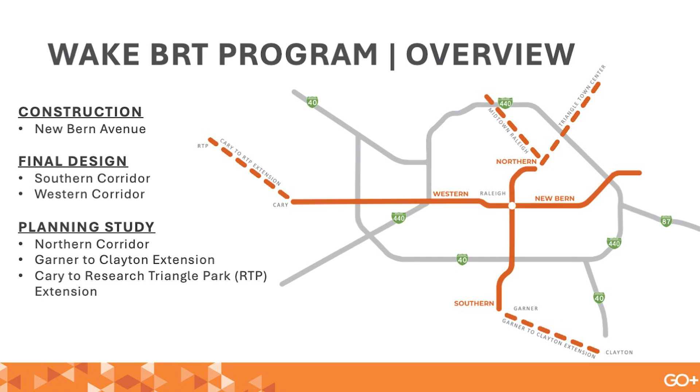The reason for having this slide and the next is to help everyone understand this is not a single project. There are multiple projects of similar scale and style following suit as soon as we begin the first project. New Bern Avenue is in that pre-construction phase.

We are looking to re-advertise the construction of New Bern Avenue in spring 2025. If all goes well from a federal funding perspective for the southern and western corridors, there are anticipated construction bid timelines as well: the southern corridor potentially in 2027, if all goes well with final design and our federal grant agreement, and the western corridor potentially in 2028, contingent on federal funding award and allocation.

Those planning studies will take a little bit longer, but again, there's more than 3 corridors — there's a 4th corridor being split into 2. There's a lot of work related to this type of project in the pipeline between now and 2035.

So we'll walk through the history for New Bern Avenue and the construction advertisement. In March of 2024, we advertised New Bern Avenue for construction. You'll hear about the project overview in a minute, but we advertised the project as a whole — the entire project, stations included, everything as one package — in March of 2024.

We did not receive any bids. We got feedback from the contractor community at that time and decided to break up the horizontal roadway work from the vertical station design work, re-advertising just the horizontal roadway work in August of 2024.

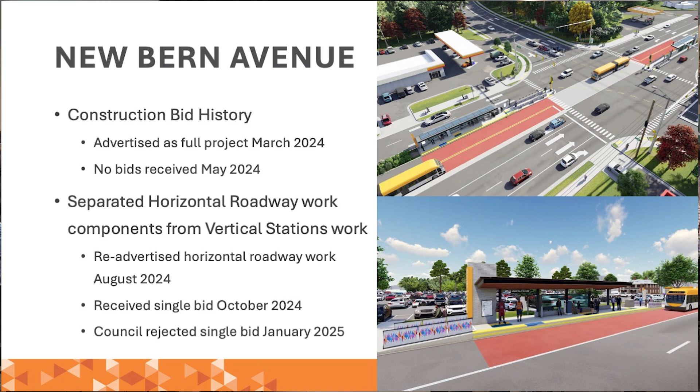We received a single bid in October of 2024, which was rejected by council in January of 2025. That is why we're here today, looking for feedback on the next steps of the approach we've identified, as well as working towards how we move this project forward.

Sam, I don't know if you want to add anything else there.

The decision to re-advertise it the first time, breaking it up, was a result of feedback from contractors in the area, contractors that have performed similar projects around the country, and other authorities that have delivered projects and were successful breaking it up that way. So that's why we came to that choice on the last round — kind of a similar loop to getting to this point.

Does anybody have any questions about those steps along the way?

It was significantly above the budget allotted for the overall project, and keep in mind that scope that was bid at that point was not the entire project anymore. So we had to consider the long-term fiscal impacts for being able to deliver future projects in the pipeline, as well as this one getting on the ground.

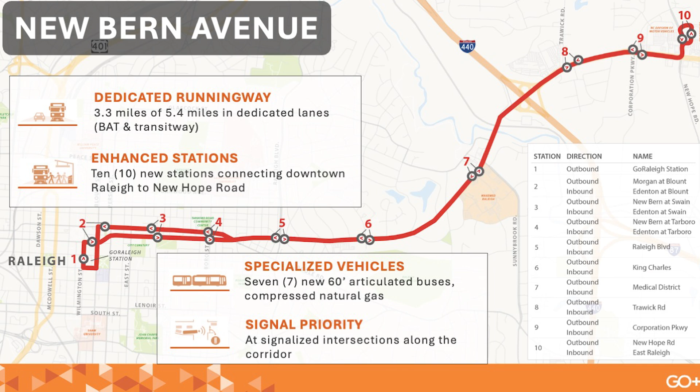Going into the actual project itself, for New Bern Avenue, we have 3.3 miles of dedicated bus lanes on a 5.4 mile corridor. Those dedicated bus lanes have different flavors. In downtown, there is right business access and transit lanes, so those are bus lanes along the right side of the roadway. In the middle part of the corridor, there's the median running transit way, which is dedicated bus lanes physically separated from general purpose traffic. We have 10 new enhanced stations totaling 19 platforms constructed as part of this project. They are about half a mile apart throughout downtown to East Raleigh. Most of them are level boarding stations, which make it easier for passengers to get on and off the bus faster. We'll have 60-foot articulated buses - we already have those - and then we have transit signal priority at signalized intersections.

Now I'm going to go through geographic areas of the work where there are some differences in how we could break up the project to allow for more cohesiveness or work opportunities.

So I mentioned the bus rapid transit running way treatments. In the downtown area, we have business access and transit lanes along the right side of the roadway. There's not a lot of significant road work happening there other than mill and surfacing, roadway resurfacing, lane restriping. There will be transit signal upgrades as well as some public utility work needed in this part of the project, and then the concrete multi-use path and crosswalks at intersections. Again, I want to highlight...

Since that first advertisement, we have decided to break out the vertical station work. So at this point, any re-advertisement will initially focus on the linear roadway work that's needed, and then the vertical station work will follow at a later date.

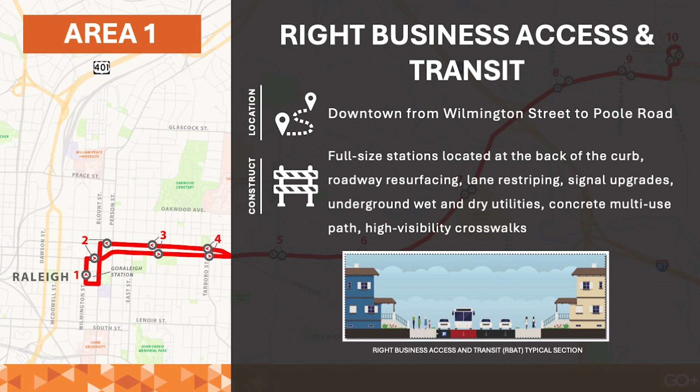So Area 2, this is the median running transit way, from Poole Road to WakeMed at Sunnybrook Road. This is the area where we have the most amount of road work happening. There is actual widening into the median to build the dedicated bus lanes. There is the multi-use path on the south side of New Bern Avenue, as well as new travel lanes for New Bern Avenue when the widening occurs. This part of the project has more significant roadway work - widening, resurfacing, median reconstruction, curb and gutter upgrades, traffic signal upgrades, and public utility conflicts that need to be moved.

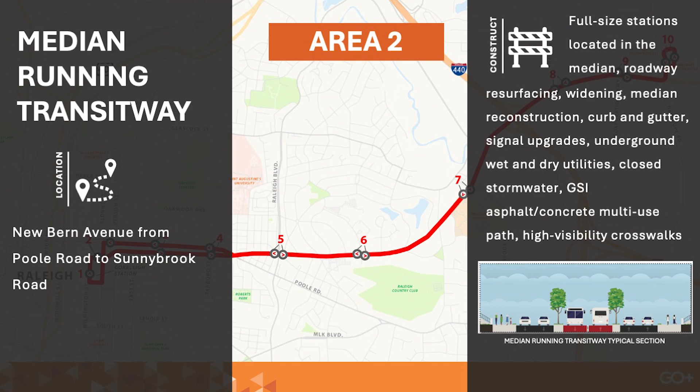Those will also happen in this area, along with some green stormwater infrastructure, and the multi-use path I mentioned. In this area we have complete lane closure in one direction for the eastbound work first, then for the westbound work. We'll have temporary traffic lanes built in the median to accommodate that traffic shift between phases, and those temporary lanes will be where ultimately the BRT bus lanes will go at the end of the project, as the final phase of construction.

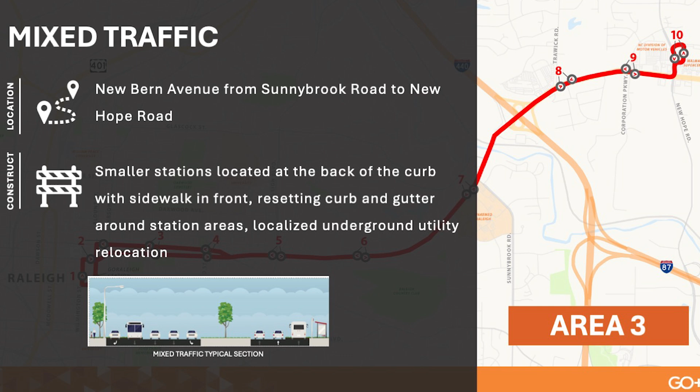And our thinking currently is that the amount of work in this area, apart from the stations, which will be bid separately, is not enough to warrant its own separate contract package. We'll talk about that a little bit more, but feel free to disabuse us of that notion today. If you disagree with that, and you'd be happy to do the amount of work that's in this area as its own separate package.

Provide that feedback, please. And this is where, again, at the end of this, there are boards for Area 1, Area 2, Area 3 that have highlights of some of the quantities that are included in that construction package. So it'll give you a better idea of how much work is anticipated under each area.

So we're going to go back to our Mentimeter. Hopefully you still have that open on your phones and are easily able to get back into it. If not, go to menti.com and use the code at the top, 63612035. Our question is, what is the first word that comes to mind when you think about bidding on the New Bern Avenue BRT project?

That is correct. We have seen a delay.

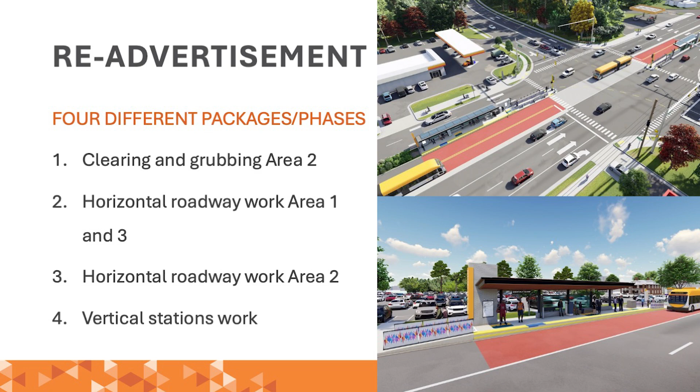What happens if you do not get any bids for horizontal roadway work Area 1 and 3?

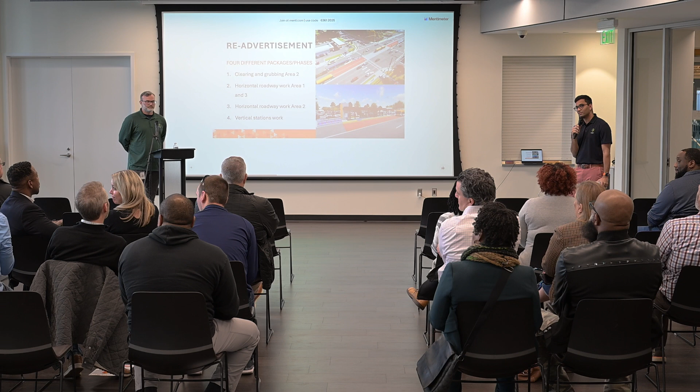Why wouldn't you bid? That's the same question we'll be faced with at each of the other stages we've been at, so we'll have to make that decision when we come to it. Is it because 1 and 3 is the worst and ugliest part of the project, and 2 is the better part? I'm just asking that question for the thought. Could happen. I think that is the feedback we're looking for here.

One of the challenges we identified as part of the project, when it was re-advertised again as a full package, was there were so much risk and utility questions or concerns within Area 2 as well as other areas of the project. So we're trying to reduce those risks by breaking it out into smaller geographic components, as well as allowing contractors who may not have a large potential pursuit library, or want to pursue a large project, to be able to identify smaller work in the area that they can go after.

That's exactly right, and I think some of the information about the utility work will address that some. Also, there are several Area 2, 3, 4 projects that have been let recently by Raleigh, so now that you're focusing in on Area 2 as opposed to the whole project, we've got similar projects that have been let that should give a good comparison base for what kind of bids we can get for similar size and scope.

We heard a lot about schedule. This is the current approach for those 4 packages: clearing and grubbing, early 2025 spring re-advertisement with an anticipated schedule of 2 months. Construction for all horizontal elements for Area 1 and 3, re-advertisement in spring of 2025 with a 24-month schedule. Construction of all horizontal elements within Area 2, the more significant roadway work, summer of 2025 with a 34-month schedule. And construction of all vertical elements, the stations, is to be determined.

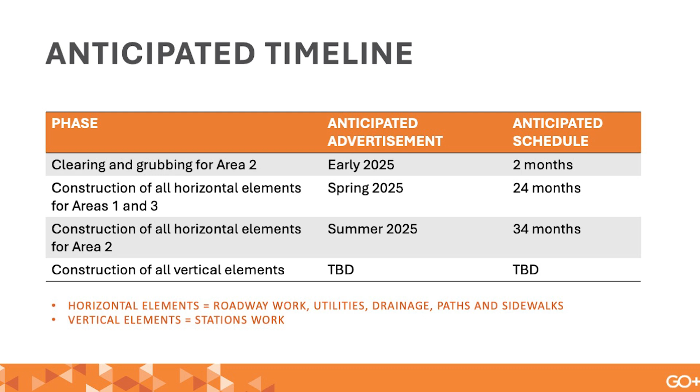That activity needs to understand how much of the horizontal roadway work has been completed to coordinate the schedule of vertical construction activities. We're also going to define more of the dates of availability for work in the vertical areas, and those will be included - as opposed to the last bid advertisement where we left that up to coordination with the horizontal contractor. We're going to provide a schedule for those things to take out some of the questions and risks people are identifying as concerns.

All right, so we're going to go to our next important question. On a scale of 1 to 10, how confident are you that the timelines identified for those packages I just mentioned are achievable? This is a dragging scale of not confident to very confident, with not confident being to the left.

Do you know if we're able to show the other slide while they're responding to this one? Oh, sorry, yeah.

Just regarding this question about achievability of timeline, is it assuming a certain budget amount or not? I'd assume that at a certain level, most timelines are achievable if you can throw enough resources at it, but it might not be as achievable based on a certain number. This is separate from assuming a contract has been awarded. So I'll try to answer it differently. I think the question is if we advertised package 1 and 3 with a 24-month schedule, would a contractor feel comfortable they can deliver that in 24 months with whatever resources they have allocated elsewhere in the region or state? I feel like it still depends on what money would be accepted as a responsive bid versus rejected. All schedules are achievable if enough resources are thrown at them, but not within any realm -- if it's a certain number, it may not be. I'm just putting that out there.

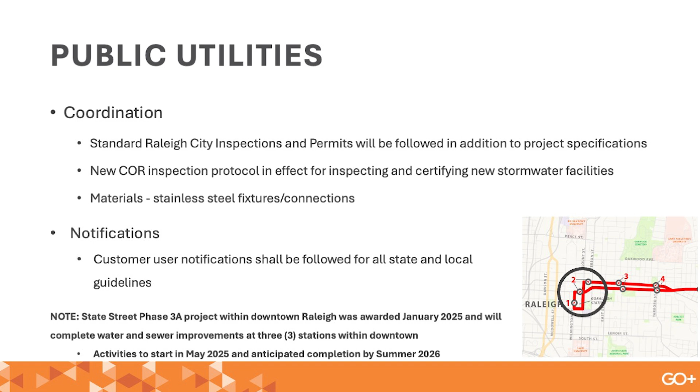So we have dates in the contract for this area for when those areas will be available, and that was kind of open-ended previously. We didn't have those dates specific in the previous bids. We'll have those included in the contract timelines this time, so that's a little more certainty there.

On the private utility side, more good news, hopefully — that's how it will be seen. We've had significant progress on private utility relocation over the period since the previous advertisement. AT&T conduit in Area 1 is done, and AT&T in Area 2 has made significant progress.

They're down past Donald Ross, and they did hit a little bit of rock, but there's good news there too because Dominion has gone through that area already. They've completed their relocations; they also hit rock, but it was manageable, and they got through it quicker than we had estimated.

So those utilities are going to be significantly complete, we estimate, before those roadway packages are likely to go to notice to proceed. There's still the conduit installation, and there will still be some work for them changing over their fiber from the old to the new conduits, but that's much more manageable in terms of getting them out of your way in any areas of common work.

Any questions on those utilities? Good news, right?

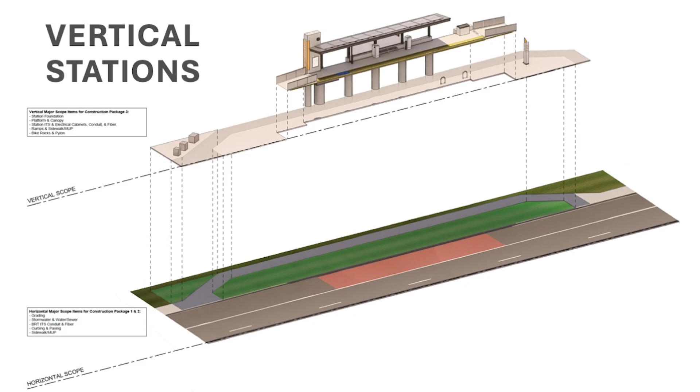This is kind of hard to see, but this is a breakout of the vertical stations and the components included in the station work versus the linear horizontal work. This is a typology of the station you would see within Area 1, on the right side of the roadway downtown. Again, you're seeing the linear road work and sidewalk work as part of the roadway side of things, with the station's vertical components separated out.

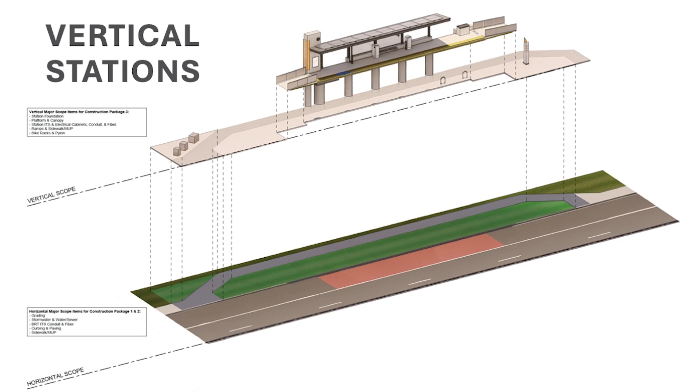I think we got a lot of questions in the previous round of advertisement about how we broke out these components, and the coordination efforts involved. We tried to provide more detail than last time. If you have specific questions on how this is being shown, talk about it today, back at the other stations, or go home, view it in the slides, and follow up with more questions. We're happy to go over any of that.

The question was whether there's any art in the stations — that won't be included in the construction packages. There is art integration, but it'll be part of the vertical work, not the linear horizontal roadway work. We do have a slide about that as well, so we'll update on what that looks like.

So I'm going to flip through the next couple of images maybe a little bit more quickly.

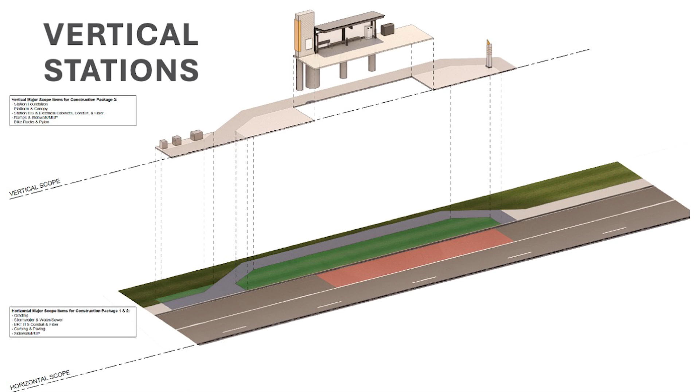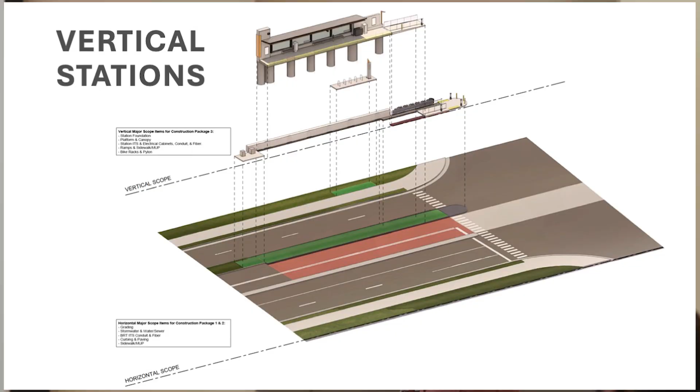So art was a question that just came up. We do have 3 different types of art. Artists have been selected, and they have worked to date on finishing their art pieces that will go into each station area.

There is concrete art that is anticipated to go into the station platform, as well as the surrounding areas of the platform. Railing art, which will actually be tied to the stations, will be provided by the City of Raleigh, with installation being the contractor's responsibility. And then windscreen art, which would be a print-ready digital file provided by the City of Raleigh through the artist, and that would go into the station vertical contract as well.

Again, we're taking on the responsibility or coordination component of working with the selected vertical design or vertical construction contractor to make sure that the art is integrated in the appropriate places through artist feedback as needed.

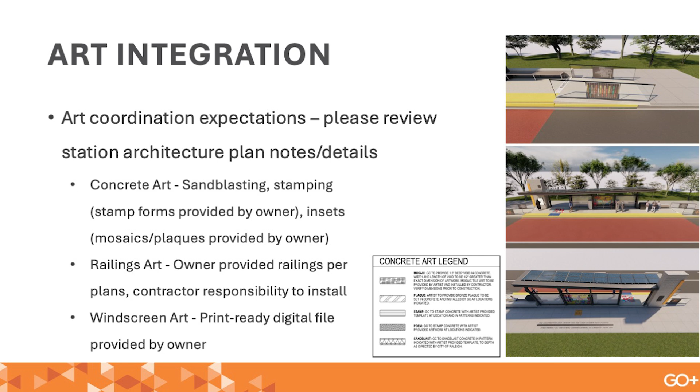And then just to reiterate, typical utility department inspections for water hookups, sewer hookups will still have to be followed as with any other typical city project.

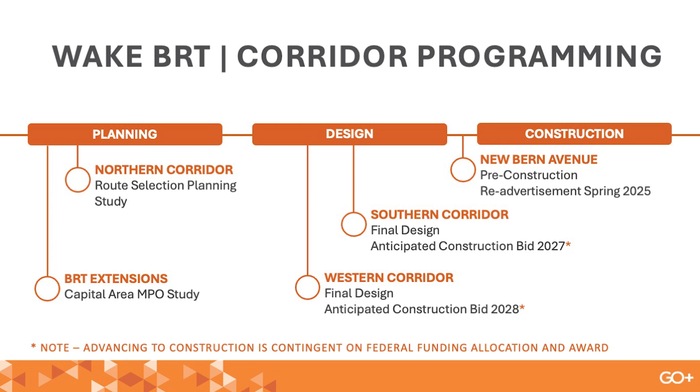All right, so we're going to segue a little bit away from New Bern Avenue for a few minutes here towards the end of the presentation, bringing back the programming slide to try to highlight the other projects coming down the pipeline. Again, I mentioned the Southern Corridor and the Western Corridor both are in final design. Western Corridor is about a year behind the Southern Corridor, but Southern Corridor potentially getting to construction bid in 2027, and then Western Corridor potentially getting to construction bid by 2028.

And so we wanted to provide a little bit more about the project for both of those corridors and the total budget that's identified through the federal grant application that we've completed for the project.

So Southern Corridor is about the same size as New Bern Avenue. It's 5.1 miles with 3.8 miles of dedicated bus lanes, 9 new stations as part of that project, 7 buses that we would be acquiring for that project as well, and we'll have traffic signal upgrades along the entire corridor. Total project cost for that project is $175 million. That is all-inclusive project cost, meaning professional services, design costs, right-of-way, as well as construction. So that's not just the construction budget, but the overall project budget submitted to the Federal Transit Administration.

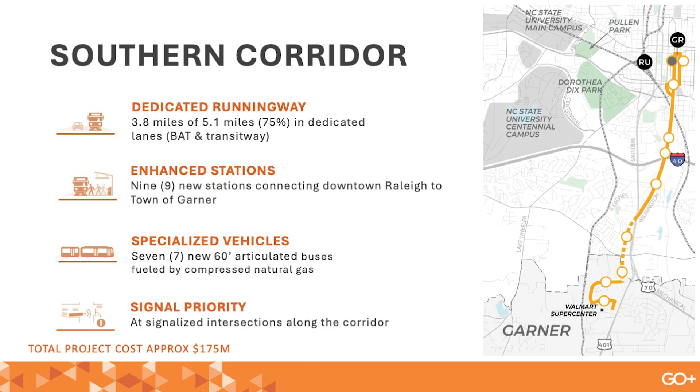And the reason for the Southern Corridor being $175 million, even at a 5-mile corridor, is because of the dashed line you see on the map, which is a new roadway extension for the project that has more right-of-way impacts as well as construction of a new roadway facility that's been on the City of Raleigh Streets plan for quite some time.

Similarly, for the Western Corridor, we have 12 miles for the entire corridor, with 7.5 miles anticipated to be in dedicated bus lanes. 18 new stations are planned for the Western Corridor connecting downtown Raleigh to downtown Cary. 10 new buses would be needed, and again, there will be traffic signal updates through signal priority at each signalized intersection. The total project cost for the Western Corridor is $390 million. Again, that's an all-inclusive federal project cost that captures the design, professional services, right-of-way, the buses, everything that's part of the project.

And the reason why we presented that is, again, to try to get feedback from the contractor community in figuring out if we need to address the Southern and Western Corridor similar to what we're doing on New Bern, or if there is more appetite for a larger project to be all-inclusive, single construction, bid advertisement of both horizontal, vertical, everything combined together.

And so if you can bring out your Menti.com poll again: in an ideal environment, what type of projects are you typically pursuing from a size perspective? Again, this is kind of capturing potentially the bonding capacity that a contractor potentially has.

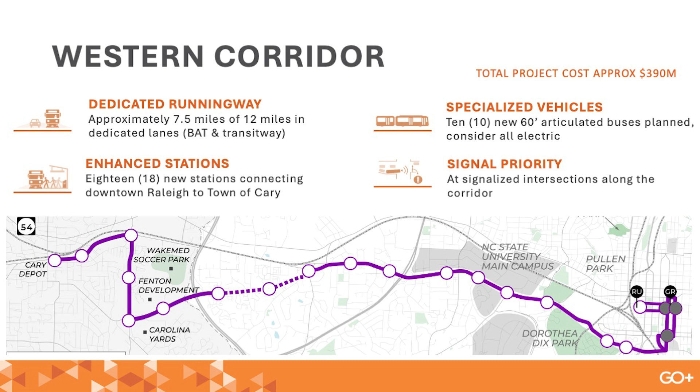Also, just trying to understand from a city perspective as we get Southern and Western closer to construction, how should we approach those projects? We will certainly hold more industry days as we get closer to those projects, having learned from New Bern Avenue, trying to make sure that this feedback of schedule, scope items, things that make sense or don't make sense from a constructability perspective are factored into our decisions and what we do.

And I should have said that as you were answering this, you could select more than one answer on this one as well, so you are not limited to a multiple choice, one answer. This was meant to provide a range where you could say, I work on a project from 10 million to 300 million.

I think 13 is that lucky number. I don't think we have more than 13 responses coming in on most of our Mentimeter polls, so I'm gonna move on to the next one.

How would you rate the attractiveness of the New Bern Avenue BRT project compared to the other projects your company is currently considering? Again, I think in the past we've heard some feedback about resources or challenges with resources in other areas of the state, potentially impacting those first round of bids that we had.